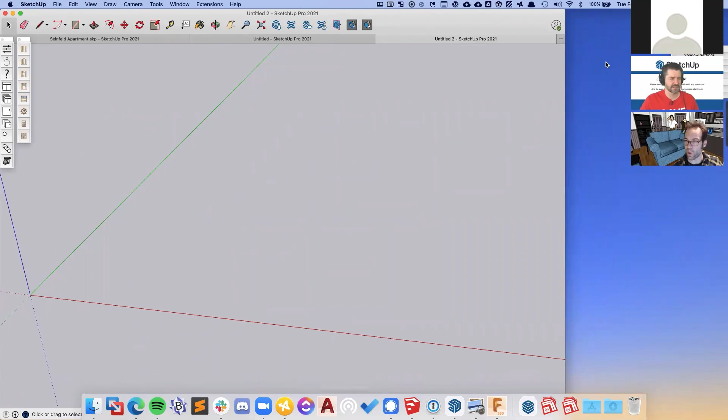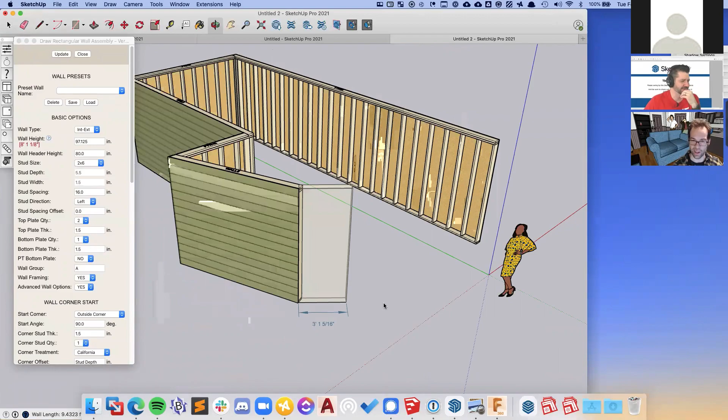Awesome. So I think maybe we will wait for a few more people to come in, but I will model some random things. And since we were talking about Medeek Wall, this is how it works, Aaron. Check this out. Well, of course, I did the wall backwards, but that's okay, I guess, depending on what your views are on where you should start your drawing. Put siding. But check that out. That is very cool. It's like, it's done.

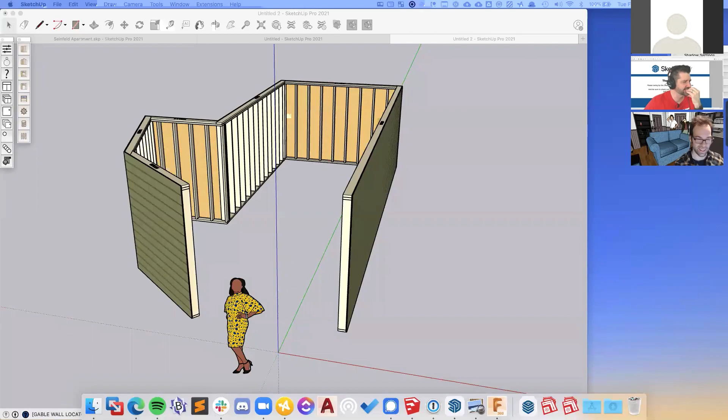That is awesome. Very nice. It works really, really well. I got roof truss diagrams and stuff. Of course, I'm gonna look at this. It does all these different kinds of roof trusses, and I started digging around with these things, and it's really good. He has really made an impressive suite of software.

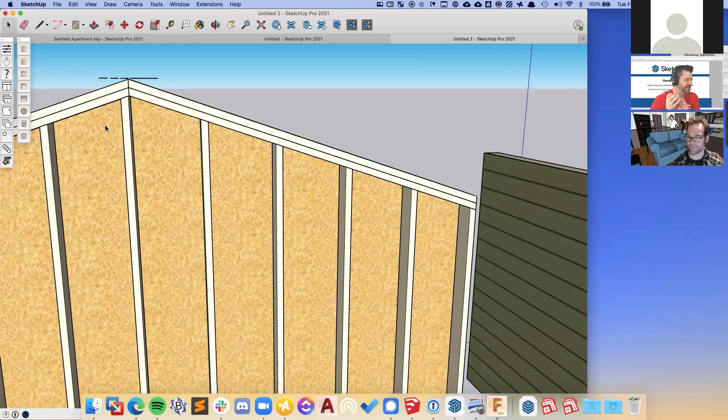And man, he just put, because this right here, what you're showing on your screen is what the company I used to work for was framing. That's right. What was the name of it? Keymark was the name of the company. We made an extension for SketchUp called Build Edge, but the main portion of our software was framing software like this. And I can tell you that wall framing in particular is one of those things where there's 2 million ways to frame any given wall. And depending on who you talk to, all but one of them are so wrong.

Well, it's funny, the garage we're planning, it's a box with a peaked roof. It's a very simple staircase in it, and I started trying to frame it out, and I got this. I mean, obviously I know SketchUp, but I'm not an experienced framer, and after screwing around with it for 5 to 10 minutes, it was like, well, job done. The garage has been designed. It was great. It was totally great.

That's so cool. So in our attendees list, we obviously have our friend Tammy Cody. Shauna is, I would say, an actual attendee. All right, private show. So my question is, Shauna, since this is our first one of the day, can we speak to you, or can you speak to us, or send us messages in the chat? If you have any special modeling requests, since you're the only one here, send them over. And this is the Shauna show right now.

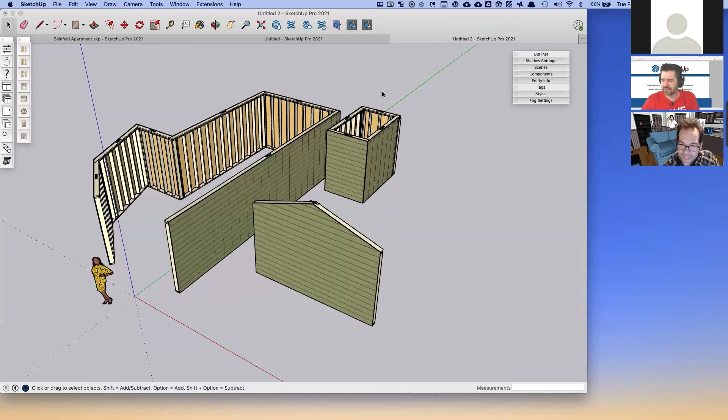We're recording this, so we'll be able to reshare it. I would just show what you're going to show, because I haven't seen your cabinet extension in, well, it's probably been many years ago at a show like this when we were able to do these face-to-face. You remember those? Remember face-to-face shows? Yeah, I know. We'll see if it works. So Shauna,

I'm going to assume that you said you kind of want to learn everything that you can about SketchUp, that you're somewhat new to it. So we're going to do a quick crash course into what SketchUp can do, and then what extensions can do. SketchUp is a pretty generalist modeler. If you want to model kitchens, if you want to model a rocket ship, if you want to model a landscape architecture, or how you might change a city around, you can do all of that in SketchUp.

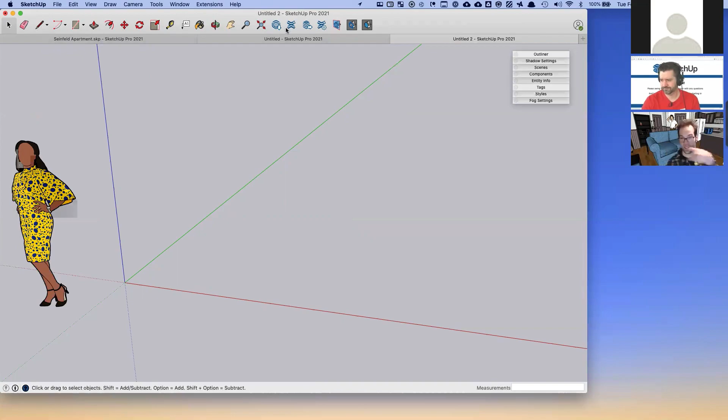It comes with a very generalized set of tools. I'm going to hide these ones for a second. When you start SketchUp, this band of tools at the top is all you really need to do most everything I just described: rocket ships, landscape architecture, anything else. What SketchUp's really magical at is being able to model complex things really quickly.

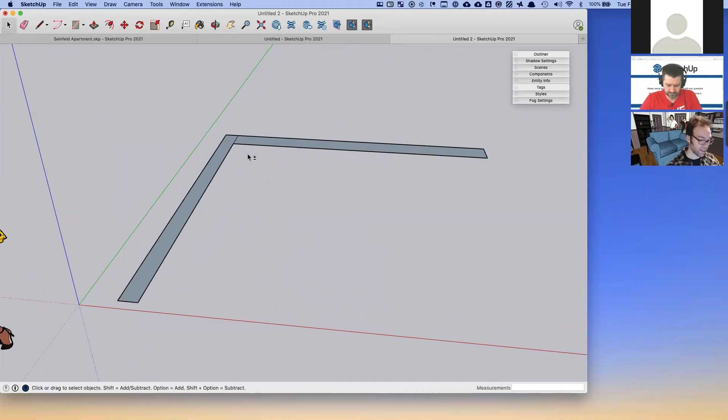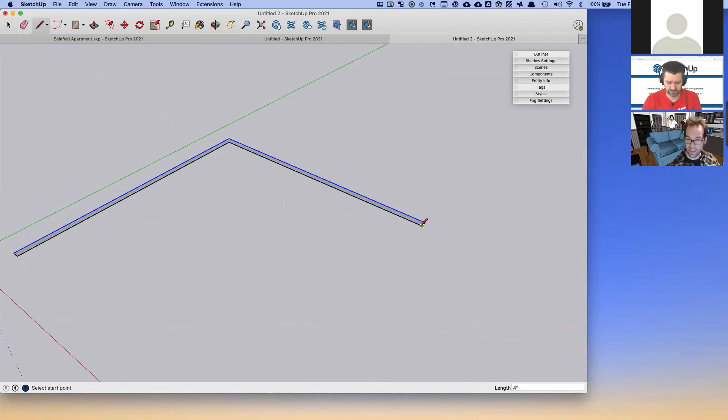Let's say we were doing a kitchen and I wanted a wall, something like this. If I'm going to do this, we should do it right. So to make an L-shaped kitchen, I would offset that wall about 4 inches. We're working in 2D now, but it's really in perspective 3D. You can see how I'm orbiting around. Then very quickly, this is where the magical part of SketchUp happens—you get into 3D like this.

You can see within 30 seconds I was able to make something 3D, and I used 2 total tools: the pencil tool and the famous push-pull tool that can turn something into 3D. This is the magic of SketchUp—how quickly you can lay something out.

Typically when I do a kitchen design, I'll come back with a wrinkled up piece of paper of field dimensions, and I'll start laying out my walls from those dimensions in here like this. Then I'll set up where the window is. Let's say I know this window is 4 feet off of this wall, and it's 36 inches wide. These are called construction lines.

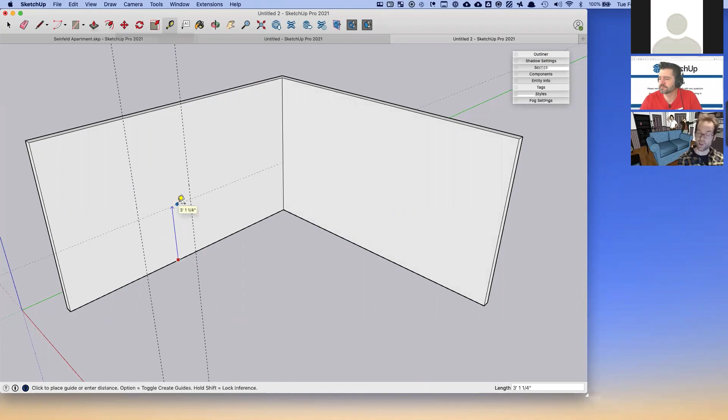So these let me—oh good, sorry Sean, I'm just catching up on the chat here. It says you've been using SketchUp for about 4 years and you've taken classes from Tammy. So I'm just gonna go ahead and shut the session down, because if you've taken classes from Tammy, you know everything. No, I'm kidding.

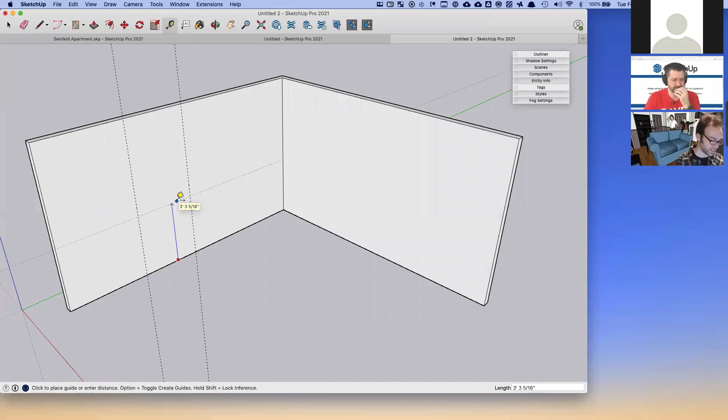So we'll show some of the extensions here. Let's finish up this wall really quick. We'll say 42 inches high, and we'll just put our window in here.

Okay, so extensions—let's get right to it. We'll just make our wall a group, because I'm trying to model neatly here. All right, so let's say you want to fill this thing up with cabinets, and you could do that reasonably easily in SketchUp.

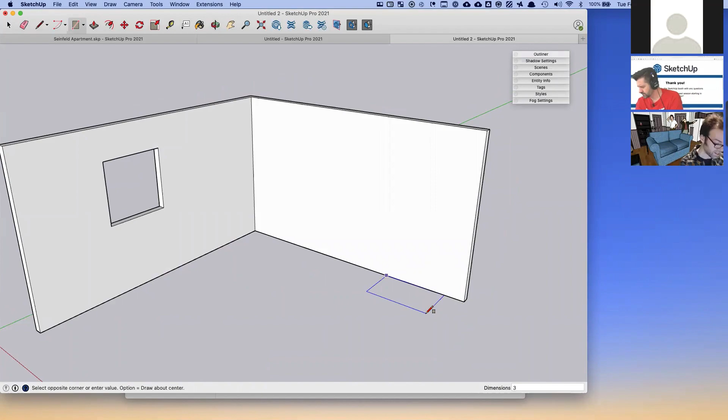One of the methods I do from time to time is I will make cabinets to the correct dimensions, like this—so this is a 36 by 24 cabinet, 34.5 high, and I might make this a group or component. It's just a general block. I'd use something like this if I was just starting to lay something out and wanted to get a feel for what the space is going to look like.

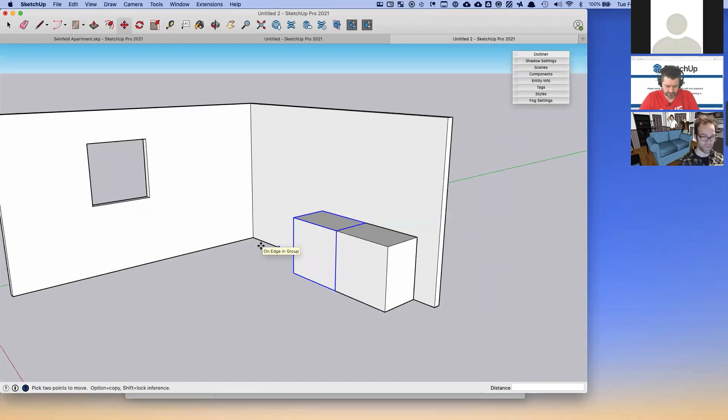Obviously these are very quick to make, but if you want an actual cabinet, you could do it in SketchUp with the native tools like this. You could draw a side panel, extrude it, copy it to make another panel, and add your toe kicks in. While it's quick and pretty intuitive in SketchUp, you can get the idea—if this was your typical 14 cabinet kitchen, this would take you a while.

So you want a more fabulous kitchen—this is what we're going to do. If you want to make kitchens faster, you can use an extension like this one.

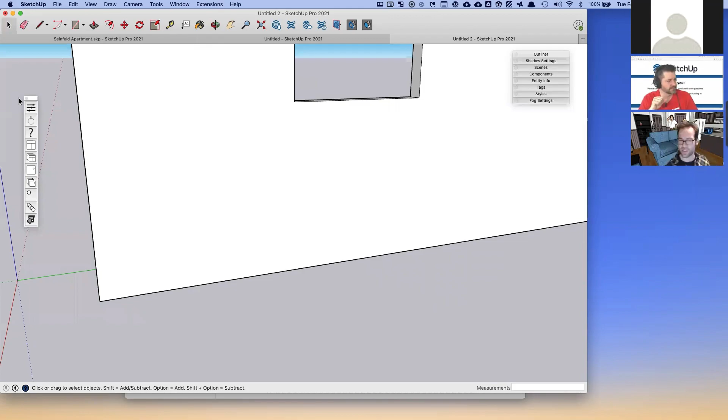So Shauna, if you can put in the message, have you installed any extensions before in SketchUp? See if that comes through here.

Okay, so I won't show you how to install extensions since you've clearly already installed some of them. Oh, we've got our friend Steve here as well. Welcome, Steve. Okay great, so you already have SketchUp, so you need to learn it. Great, so let's just jump right in.

All right, so this is the toolbar. We've got a settings panel, this little BB-8 shaped person for your account, and then single cabinet, multiple cabinets, single door, multiple door, single hardware, multiple hardware, and dynamic component options, which we'll get to. I'm just going to put this over here—we'll get that in a second.

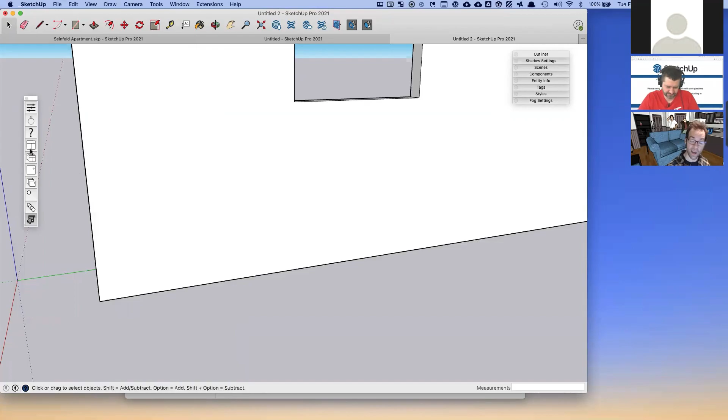So if you click the single cabinet button, that's going to bring up this big window here, and it's going to ask you to sign in. Let's hope I remember my own password.

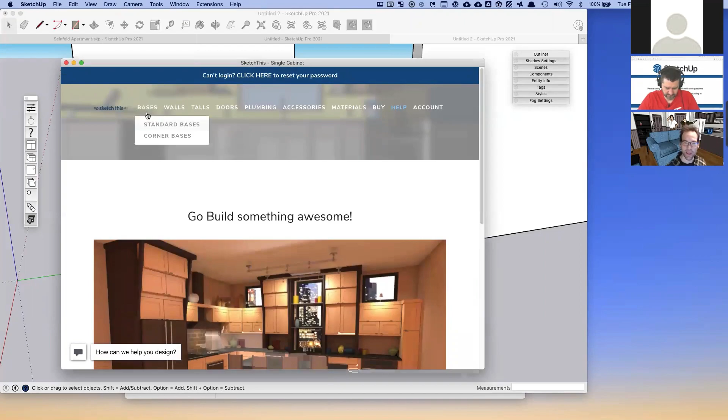Does he remember his password? He does.

All right, so you're going to get this large window, and this gives you the ability to browse bases, walls, talls, doors, plumbing accessories, that sort of stuff. When you browse this way, you get a larger window, and once you select a cabinet, this window is going to close. So let's select our sink base.

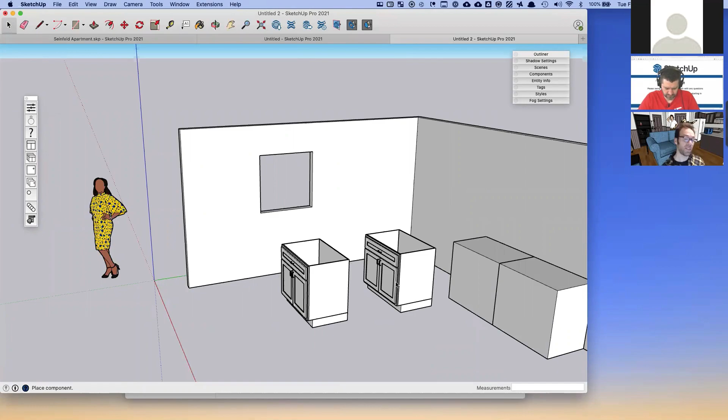This will load into SketchUp, and it comes in attached to your mouse pointer like this. You can click it and set it down, and that will leave a copy of the cabinet. You can click and keep clicking to add more, but we only need one sink base, so we're just going to delete these for right now.

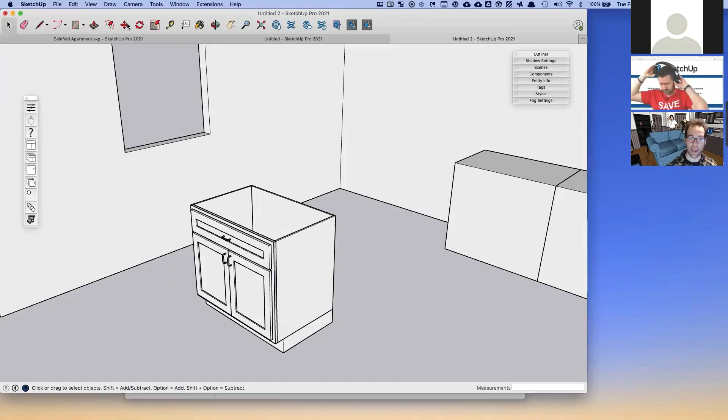So now you have the cabinet, and it's on the ground plane. What I typically like to do next, if the cabinet is not turned the right way, you can hit M for the move tool, which is this four-way arrow on the top bar. If you hover over the cabinets, you see these red plus marks.

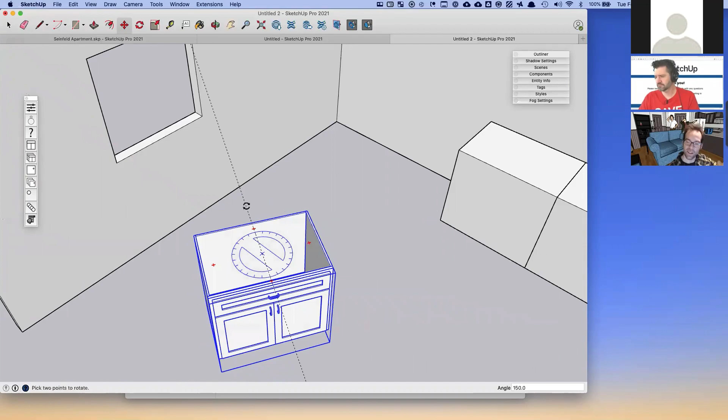If you hover over one of the plus marks, it allows you to rotate the cabinet around like this. The trick with this, if Tammy hasn't shown you yet, is that if you're far away from the protractor, your angle is somewhat arbitrary, but if you're close to the protractor, it'll snap at every 15 degrees. So you can get it turned like this, so it's moved towards the window.

Once you click again, you're still on the move tool, so I like to grab it by the bottom corner and just stick it on the wall.

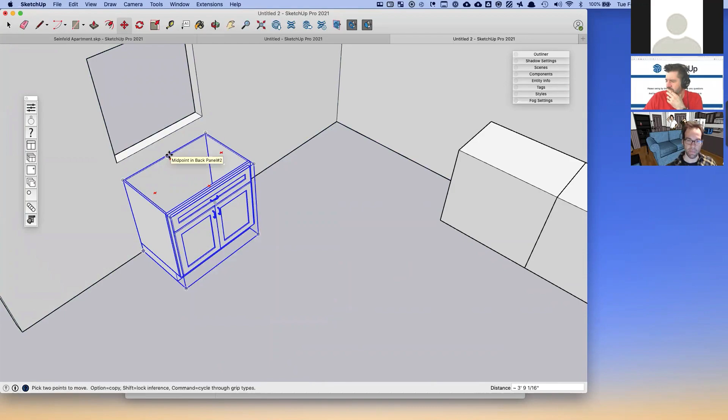Then you can hover over it again, and you can select the midpoint. Click and release, and you can slide it. I want this cabinet centered under this window here, and it's going to be on the green axis.

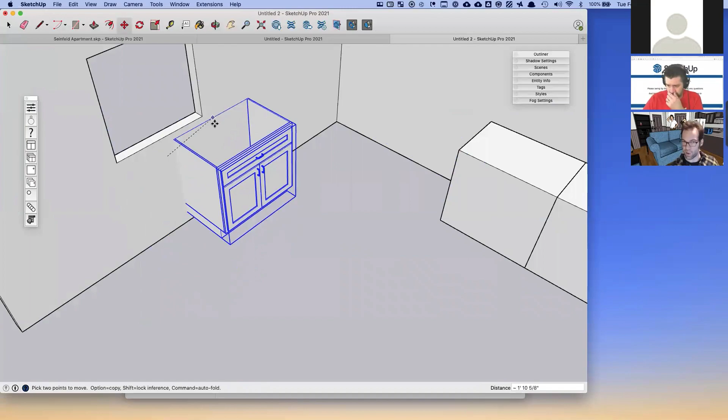Now here's the tricky part: if you hold down Shift like this, it will lock it on the green axis, so no matter where I move my pointer, this cabinet is now going to slide along this wall. If I let go of Shift, the cabinet's going to move all over the place, which we don't want. So we'll hold down Shift, and then I can snap to it by pointing at the center of the window, and it will kind of magnetize itself right there.

So now we've got that sink base, that 36-inch sink base, snapped right on the center of the window.

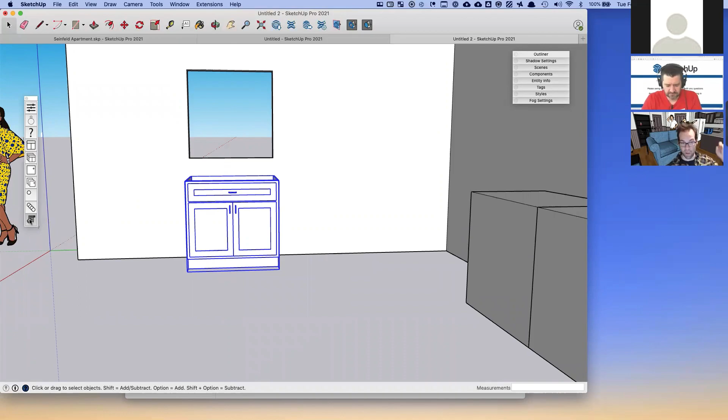So now, if you want to fool with the options—this may be new if you haven't dug super deeply into this—if you have the cabinet you want to alter selected, and you click this button all the way at the bottom of our toolbar, this will bring up component options. These all come in with a standard configuration.

We try to pick the most common sizes, like typically sink bases are 36 inches. We try to make it so you get the most likely configuration, but if you want to change it, it's pretty easy. So let's say we wanted a 42-inch sink base. We'll just type in 42 and press apply, and you'll see that the cabinet gets a little bit bigger.

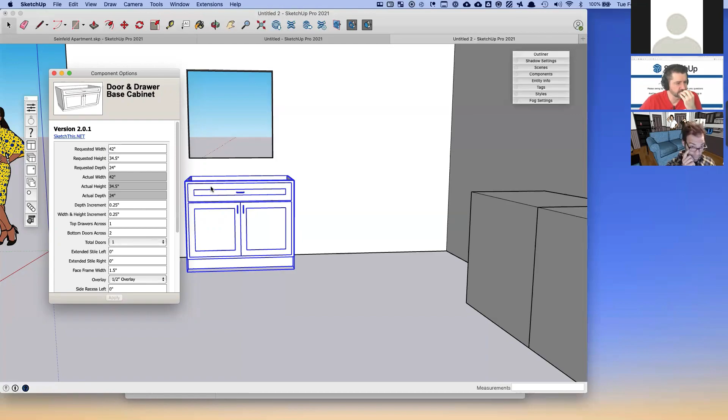Now there's an interesting thing: these are called dynamic components in SketchUp. If you're super geeky, these are something you can create yourself, although I will say that on my first cabinet, I had over 100 hours invested into the first one. So not for the faint of heart, which is why we created this catalog. But there's some funny math that has to happen with these.

One of the things people new to this plugin sometimes get a little confused about is the requested width versus the actual width. Without going into a very boring, in-depth discussion about how SketchUp calculates the scale of components, it essentially works out like this: you have a depth increment and a width increment multiplier.

I don't know what kind of cabinets you typically sell, but if you're doing something like builder grade or hardware store style ones, they oftentimes come in 3-inch increments. So you can change that to 3. So you could say, hey, I want a 41.125 inch wide cabinet. If you do that, it's not going to accept that because that number isn't divisible by 3. So what it's actually going to give you is a 42-inch cabinet. It's going to round to the nearest one.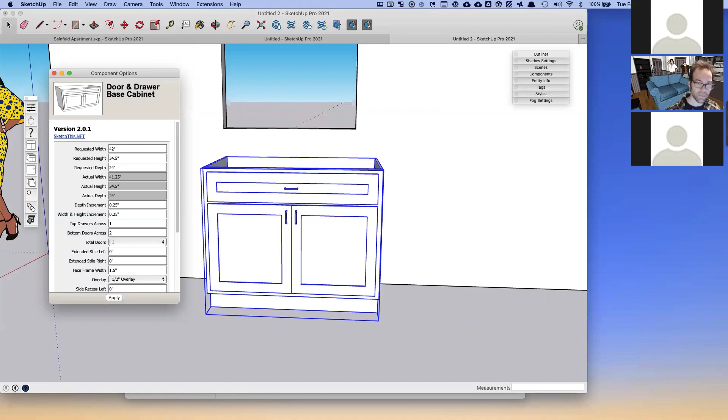But if you change that increment to 0.0625, something like that, now it will take that 41 1/8 and actually give you a 41 1/8, because the increment you gave divides evenly into the number you put in. So that often gets people a little stuck in the beginning. We typically leave these at 1/4 of an inch. It feels like a good compromise between allowing you some flexibility, but not letting you make cabinets that are in weird 64ths of an inch. So we'll put this back at 42, like that.

The rest of the options in here you can change: the amount of drawers you'd want across the top, the amount of doors. Let's say you wanted something crazy, like a 5-drawer base. I think that'll work. You can do something like that. Maybe 4 is better. You can change this one here.

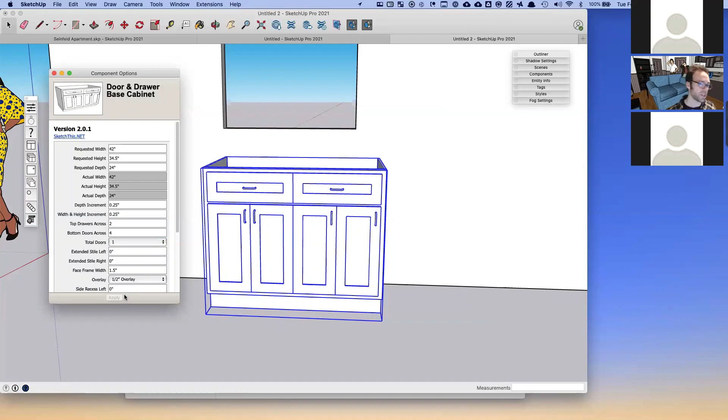So this is going to stack doors on top of each other. You can kind of see pretty quickly, the idea when you look in the catalog is that less is more. We have very few individual cabinets that are the popular ones, but each of them has a lot of flexibility built in.

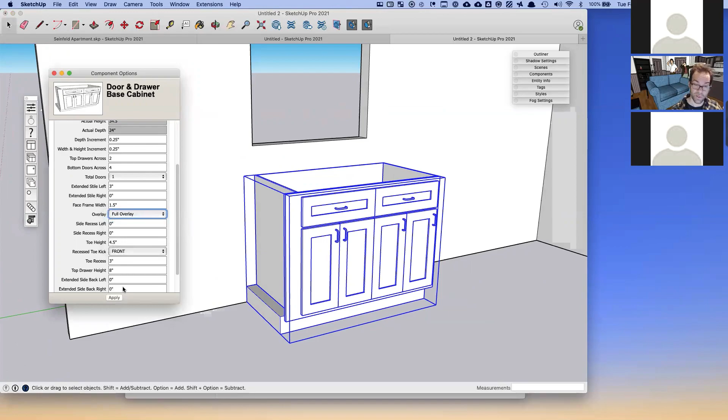Moving down, you can go through here and add extended stiles. Let's say you want a scribe that you want to cut off in the field, scribe to a wall or another cabinet. You can do that. You can change the door overlay, so if you want to switch over to something a little fancier, a full overlay, it'll close up those gaps a little bit. We also have inset, beaded inset, frameless, and 3/8 lipped. So all the popular different door configurations are in there.

You can do side recess, so if you want to back the side panel off into the face frame like that, that's always an option. This is one I was actually just emailing with somebody the other day on.

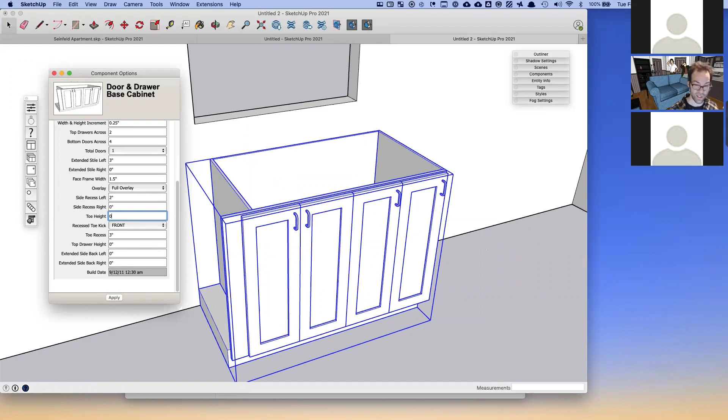Let's say you wanted to eliminate the top drawers. There's two ways you could do that. You could download a cabinet that we have pre-configured with no top drawer, or you can just change the top drawer height to 0 and it will take it away. Same goes for things like the toe kick. If you change the toe kick height to 0, it won't just smash it, it'll actually remove it so it goes right to the floor, or you can make that higher or lower.

If you're doing ADA cabinets or something like that, you can create them with those settings. So that's kind of the cabinet basics there. Now some of the other hidden tricks and features.

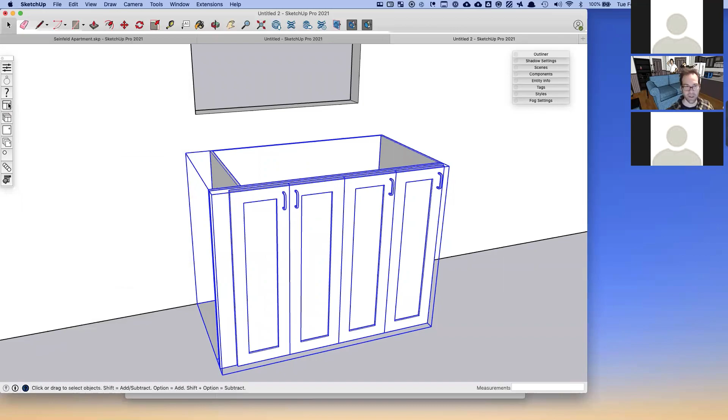So I showed you the single cabinet button here, which opens up this big browser. Again, the big browser is meant so that when you click into a cabinet, or go to a different category, like let's say the how-to-use-things section, it allows you to see the video that walks you through how to create these things in a larger window, so it's easy to view in SketchUp.

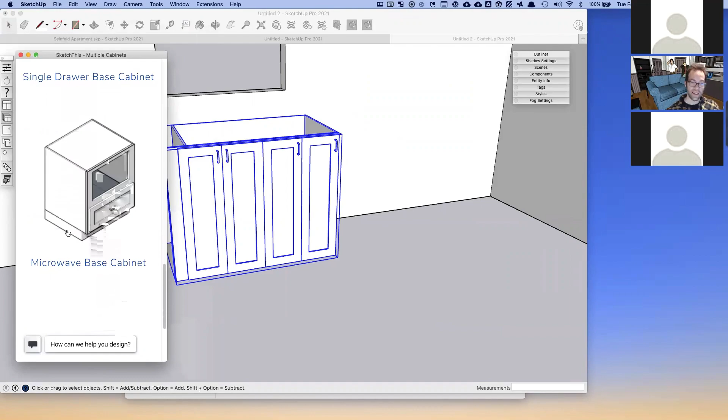But if you're a little bit more of a power user, you can go to the multi-cabinet one here. What this gives you is the same catalog, but a narrower view, and it lets you keep the window off to the side or even on a different screen if you're on a dual monitor setup. When you click to load a cabinet in, the window does not close, so you can very quickly get a variety of different cabinets. So if you're putting a kitchen together that's got a bunch of different cabinets...

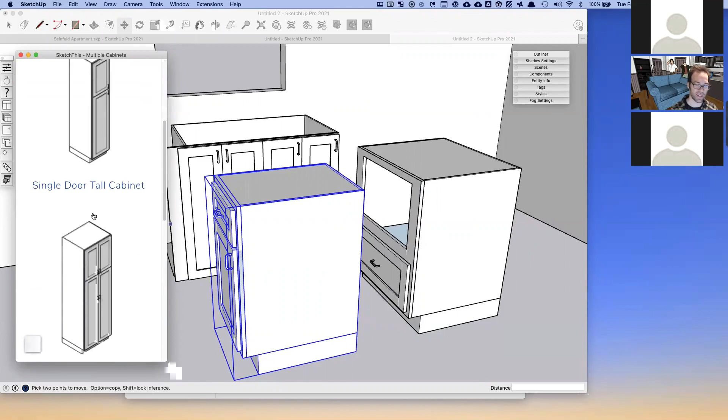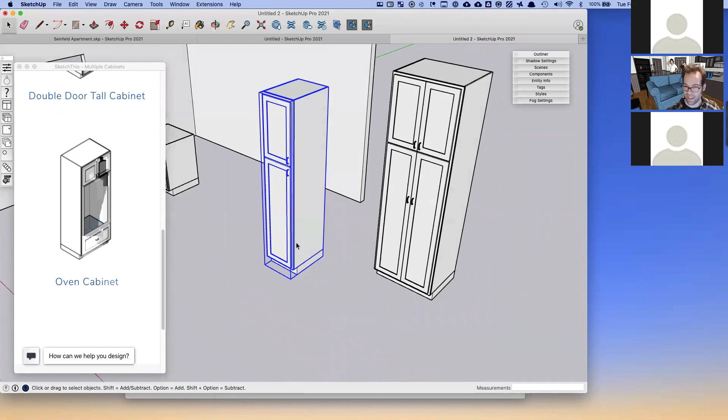We want some actual cabinets here, so we'll go to talls and get a couple. This is what I like to do: go in and grab everything I think I'm going to need in the beginning, set it all in here, then move this window off or out of the way. I can get in here and gather up all my Legos, as it were, and put these in. This is not shaping up to be a real pro level kitchen design, but we can fix that.

So here's another trick that I like to do. This is an issue I run into fairly regularly. Let's say I put this first cabinet down here, which was easy because I could grab it by its corner and stick it along this wall, just like I did with that sink base earlier. But let's say I want to stick this cabinet to the far corner of this one, the corner we can't see. I could click on the move tool and click on this base one, but you can't really snap to the other side.

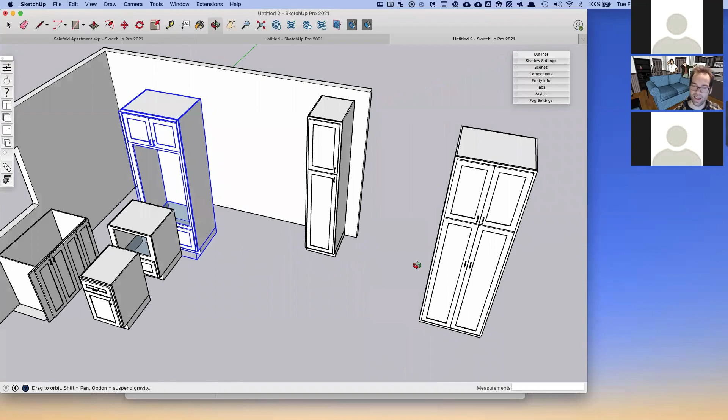So I could rotate around here, and SketchUp gives you two ways to do this. If you're looking a certain way, SketchUp will actually make the thing you're looking through transparent, translucent, and you can go in and find that corner and snap. This is new for 2020, I believe—when Aaron gets back he can correct me if that's a 2020 exclusive feature. So you're kind of looking... I nailed it. Nice. That'll let you look through a cabinet like this and snap it in there.

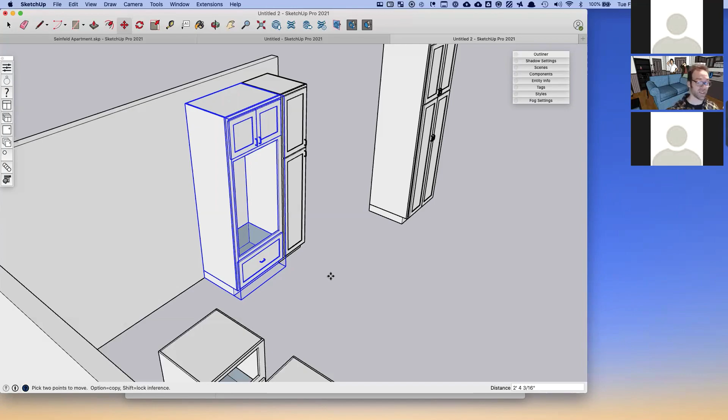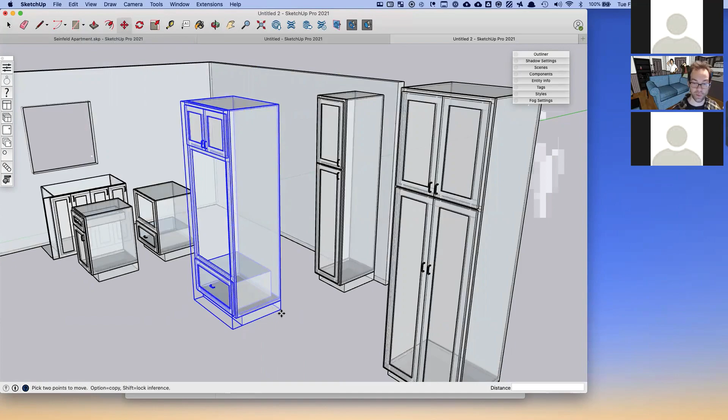If you're on an older version of SketchUp, or you want it to snap through something and can't get it to the other side, here's the trick I've done for years. Go to View, then Face Style, then X-Ray, and this puts SketchUp into X-Ray mode. Then click the move tool, and now it's a lot easier because you're seeing through everything. You can put your cabinets and snap them to each other like this.

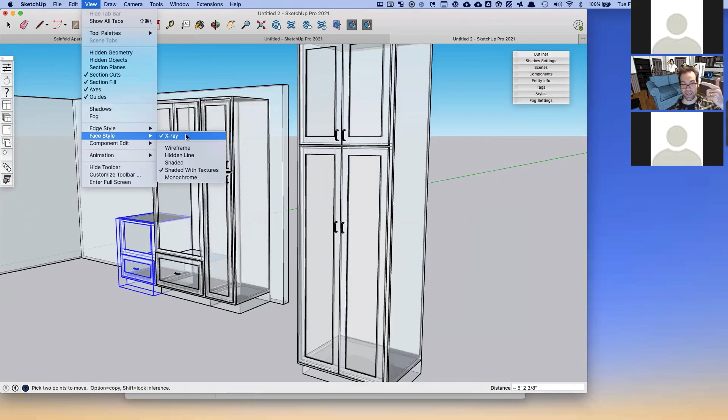Now here's the tricky part. You do have to go click View—that's one click—then Face Style, two clicks, then X-ray, three clicks. So it's like six clicks if you want to toggle back and forth. So I do it like this: I have a shortcut key set up so I can toggle back and forth very quickly. Let me just move my zoom window out of the way here.

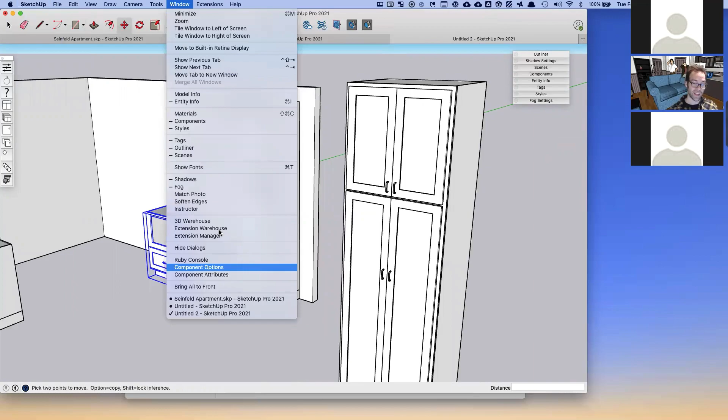If you go to Window—sorry, I'm on a Mac, so it's SketchUp and Preferences, but on a PC you go to Window and there's a SketchUp preferences in there—you can bring up this window and it'll show shortcuts. If you search for something like 'ray', you can assign whatever key or combination of keys you like to the X-ray shortcut, or actually any shortcut in SketchUp. I assigned mine to X, so now when I tap X I can just switch back and forth.

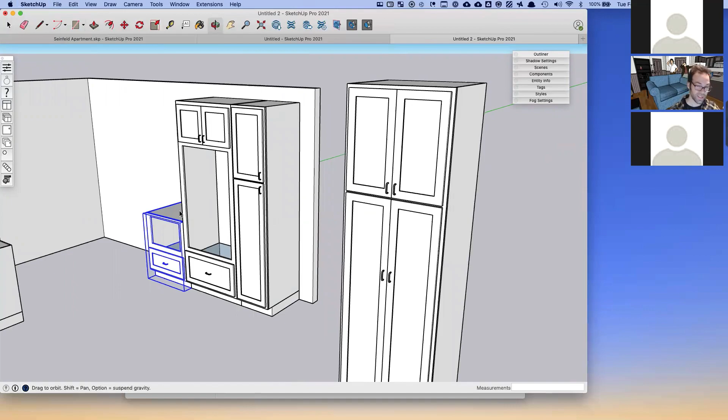I use this all the time when I'm designing stuff like this. I'll have a cabinet, I'm in the middle of a move, just tap X, I get that see-through thing there. Tap X again, and I'm back to normal. So I highly recommend setting that one up.

Let's see, what else do we have in here? Oh, let's do doors. The cabinets come standard with this kind of shaker frame and panel door style. It's pretty generic—it's kind of meant to be that way so it works for most designs. But let's say you want to change the door. You can click on the door icon, and there's two ways you can change it.

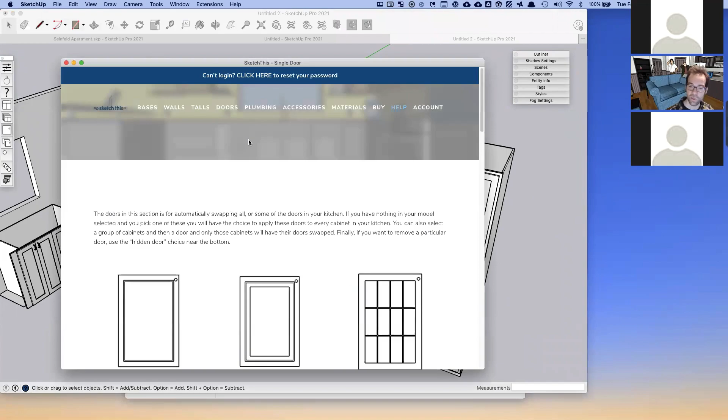Let's say we wanted this—I don't know, let's go with this beadboard door. When you click a door, it'll come up with a dialog asking: yes to replace all doors in all active cabinets, no to pick doors individually, or cancel to choose again. I'm actually going to pick no. This gives me a cursor, and each door I now click on, it lets me change individually.

So I can go through and pick the ones that I want to swap out, and it will swap them like this. Then when you're done, just press space bar.

Now let's say I wanted to do it a little differently. Let's say I wanted this entire bank of cabinets to have different doors. So I can just select them using the select tool, which is the arrow tool in SketchUp, and I can go over to doors. Let's put this Summit flat panel.

So the dialog's going to look a little different. Now it's going to say yes to replace all doors in selected cabinets, and I'm going to hit yes, and it's going to go through here and change. That was not a very exciting door style, but it did go through and changed them all.

So this is a really good way to change big swaths of cabinets or individual cabinets at one time. The icons here are single door and multi-door.

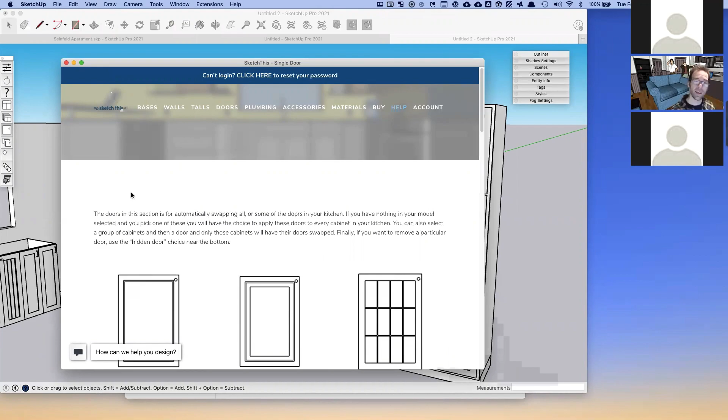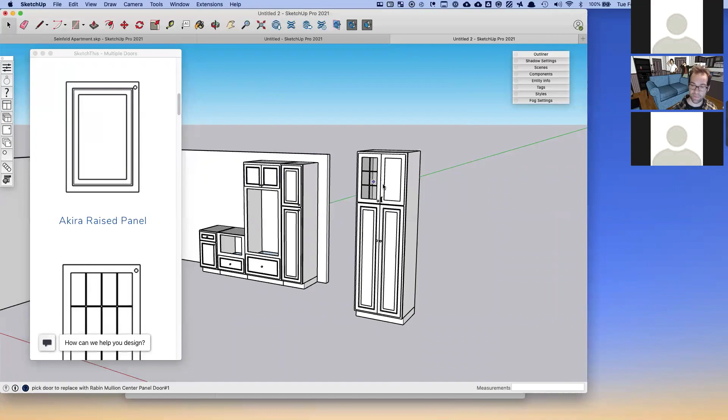Single door brings up this big browser window, works just like the cabinet browser, where when you select something this window goes away. If you want to do things a little faster, you can use the multi-doors option, and same sort of thing, you get a more compact browser, and as you select doors, the door browser stays there. So it allows you to go through and pick different doors as you go along, making it a little faster to do stuff like this.

So that's the difference between the multi-select and the single select. The last one is hardware. You can do the same sort of thing - we have individual hardware and multi-hardware.

So let's say I want to put some cup pulls on some of my drawers. Same dialog, very similar to door swapping - I can say yes to replace all hardware in all active cabinets, or no to do it individually. Since I don't want cup pulls maybe on my doors, I'm going to do this individually.

So we'll go in here and let's say I want to switch this one and this one and this one, and we'll leave those alone. Probably want a cup pull over here. So I hit spacebar when I'm done.

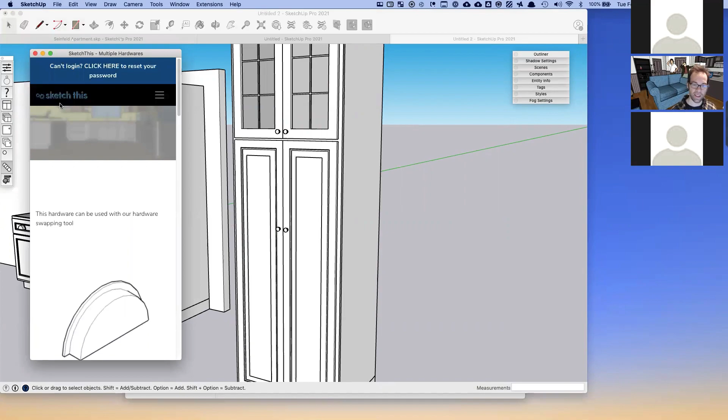Same deal here - you can do multi-select and go in here. Let's say I want to put a curved pull on these doors like that. So pretty simple there.

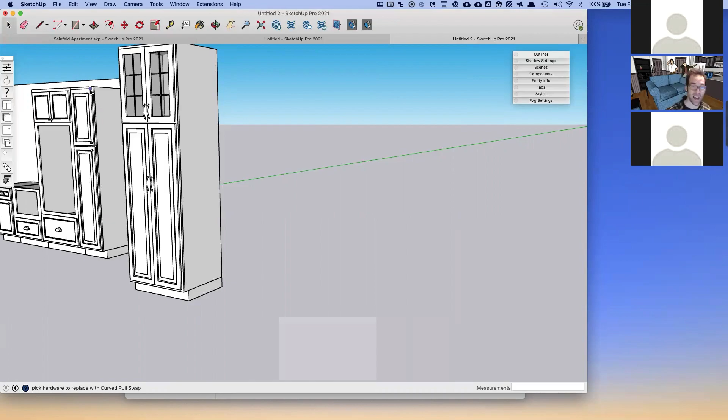So now, Shauna, if you're still with us, here are the super double secret features that are not really documented anywhere, but you can access. So when you have this component options dialog open...

Anything that's a dynamic component in SketchUp - our stuff or anything else - when you have one of those dynamic components selected, you get all of these options where you can configure them. So here's the tricky part.

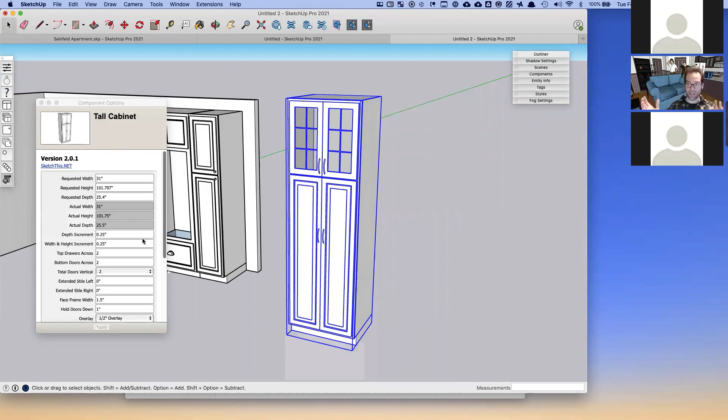Dynamic components in SketchUp, like these cabinets, are made up of groups of other dynamic components. So right now we have the cabinet selected, but let me just do this on a kind of generic base cabinet here. I'll show you what I mean - we'll take another sink base here.

Okay, so I have this sink cabinet selected, and I'll just move this off over here like this. Okay, so I have this cabinet selected. These options are exposed - these are the ones we just saw.

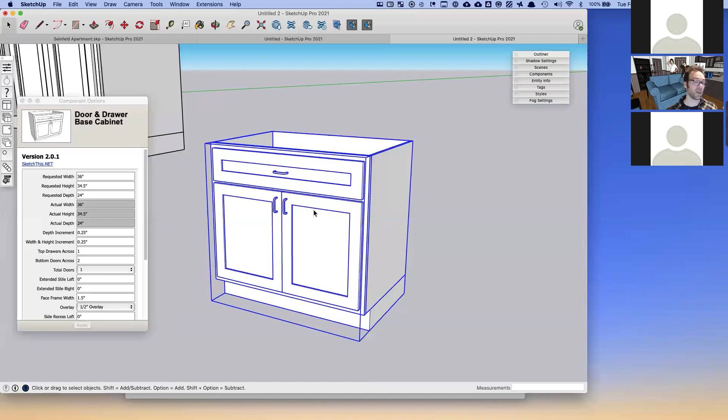So if I double click on this, it's taking us inside the component that is this cabinet. You can kind of tell because we have this dotted bounding box and the rest of our model is kind of grayed out.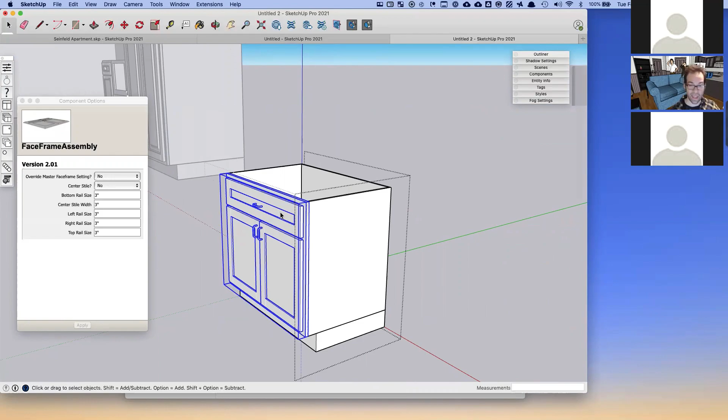So now I can select on just the front of the cabinet and you get what's called face frame assembly. And what's cool about face frame assembly is that you can configure some extra features. So occasionally we have people that want to mess with the face frames a little bit more than we give you options for.

So you can go in here and say override face frame setting, and you can turn on a center stile. That is not a feature that's exposed in the normal setting. So if I hit apply, you now get a center stile.

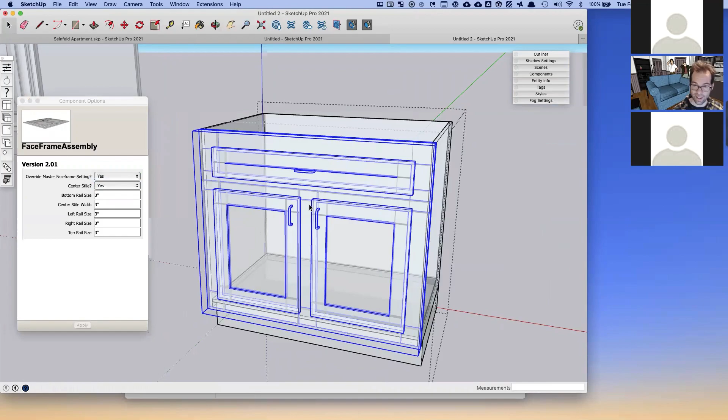I'll turn off X-ray here so you can see it. You get that center stile in there, and you can see all the face frames got a little bit bigger. That's because they're now defaulted to 3 inches, but you can change the sizes if you want, and you can change them all individually.

Occasionally people want fatter face frames. This is something we might have a video for somewhere, but it's not in the regular documentation because it's a slightly riskier area to get into, since you can theoretically click on other parts, and sometimes there are features in here you maybe shouldn't be touching.

But you're certainly not going to destroy your model if you use the wrong setting—you might break the individual cabinet, and you'd just have to download a new one. These are some sort of hidden extra features in there. We also sometimes get people who want to do crazy stuff, curved things, pipe chases through cabinets, just really odd stuff.

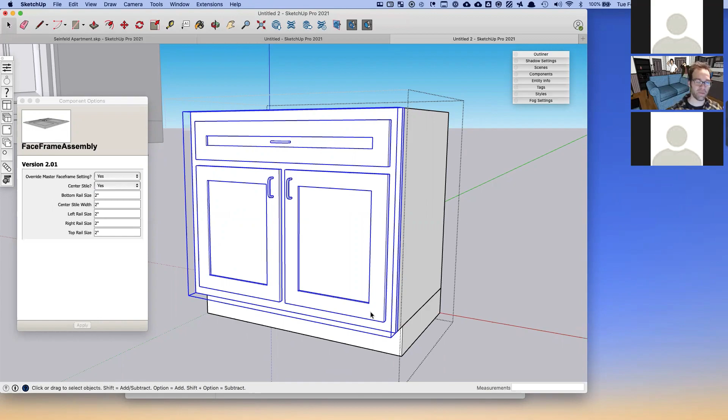What I would recommend—and I'm assuming since you've learned from Tammy you probably have some pretty good SketchUp experience under your belt—is to think of this plugin as your 80 to 90% solution. And what I mean by that is this.

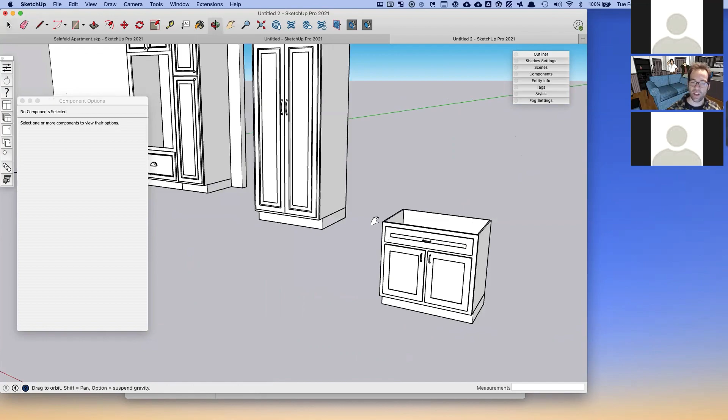Let's say you wanted to do a farm sink. Here, let's get a cabinet that's not destroyed. We'll make a little farm sink here.

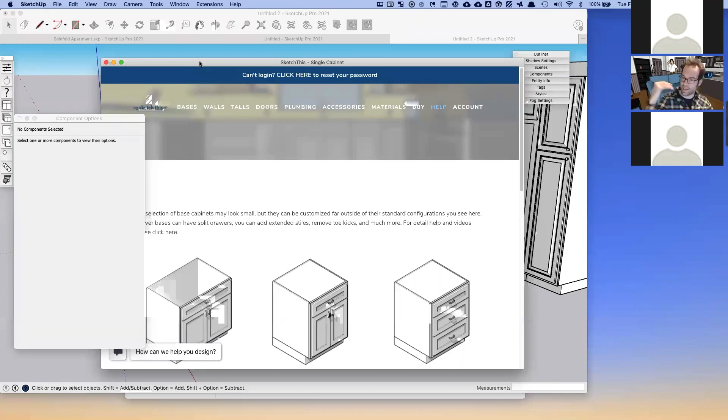Hey Eric? Yeah, it's right about 11 o'clock, so you might want to make this your last. I was assuming we'd go through Q&A time. Well, we're kind of doing Q&A right now. So wait, I go to 11 and then that's it? Yeah. Okay, so if you want to show this example and then wrap it, that would be great.

Okay, super quick—this is my recommendation for doing something like a farm sink. You're going to have a tough time making this into a farm sink directly, so here's the trick: go in here and hide the door, which just means you're deleting it.

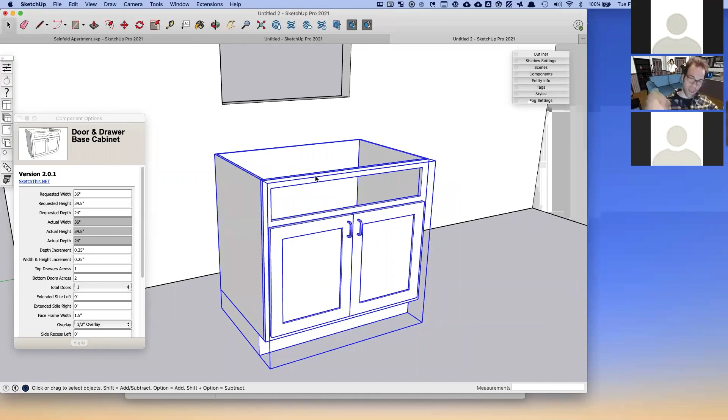Get the cabinet the size you want using the options, make it whatever general size you want, and then go in here and keep clicking until you find the part you want to delete. So like this top rail would be something you'd want to delete—just right click it and click hide. Then use this as a template to start drawing your farm sink.

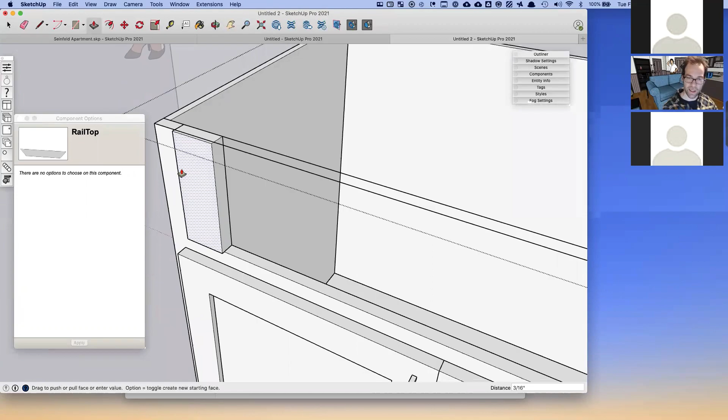I'll just make a rectangle here, pull this—again, I'm going to really quickly make this. I probably should learn how to use this program properly. So we'll go right here, go like this. Farm sink in under a minute. So there's your farm sink.

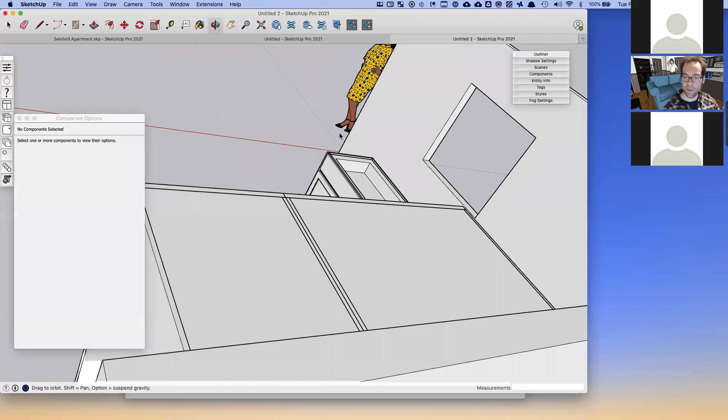The recommendation when you do something like this is to get the cabinet to the right size first, because when you start messing with the internals and try to resize it again, sometimes the cabinet can blow up. But think of these as just a starting template, and then you can do curved work and all kinds of other stuff.

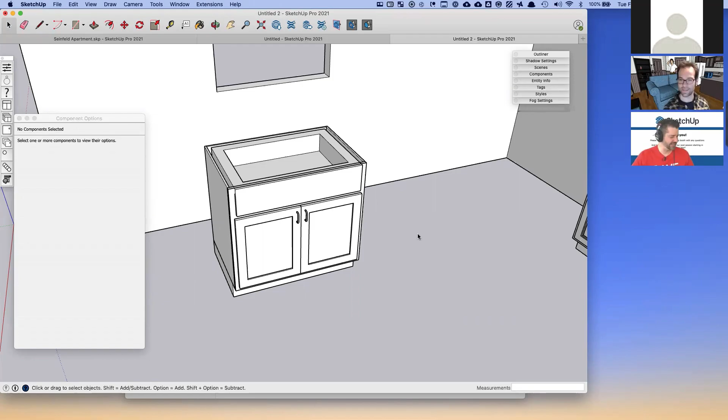Change host—okay, you should be the host now, sir. Alright, well, thank you very much. Thanks, Eric, that was awesome. I actually learned some stuff there. There's some stuff I had not seen before.